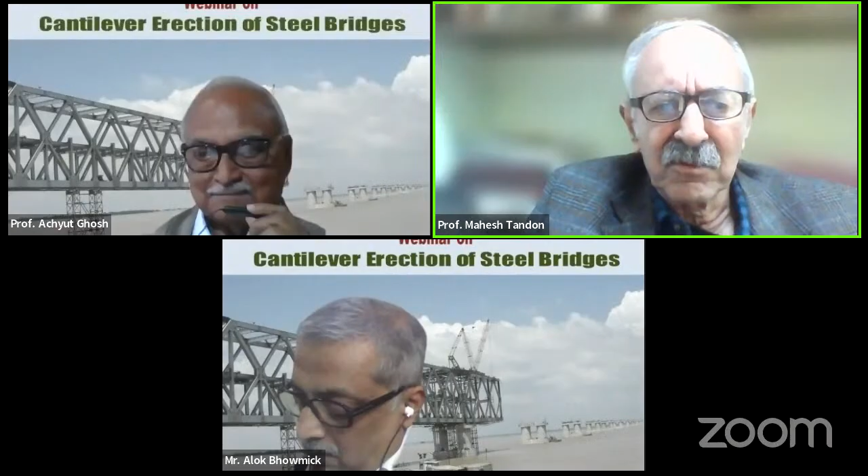So we have all seen and heard, and we know about cantilever construction of concrete bridges, but not many people know about the same technology or similar technology being used for steel bridges. So that is the subject of presentation of Professor Achyut Ghosh today. May I request with these few words Professor Ghosh to take over and give us an idea of the cantilever construction of steel bridges.

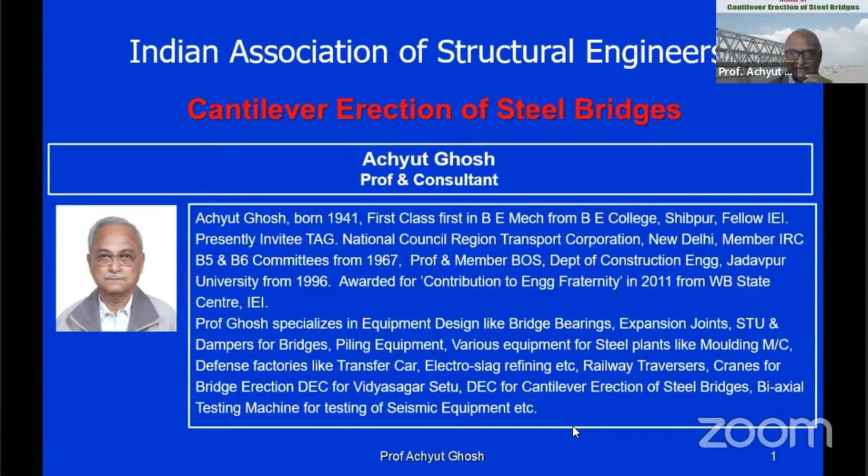So I'll share my screen. Okay, how do I do it? Yes, share. Achyut is very competent in all these digital things, at the age of 81. The way you started, I thought you were digitally handicapped like me. But we learned a little 15 minutes before - they taught us how it has to be done. Okay, so this I'll put like this. How do I do it? Okay, that is fine, we go next.

As I said, this is our subject today. But to our friends in the engineering profession who do not use the technology of preferred numbers in their profession, I believe they are losing something.

So in the course of this cantilever erection steel bridges scheme, if I start talking preferred numbers like a professional talk, I think people will fly away, they will be afraid. So in between this cantilever erection scheme, I'll introduce the subject of preferred numbers - how do I select the length of the jib, how do I select the length of the mast, and various other things. How does an engineer select the dimension of a room? How does an engineer select the span of a bridge? All this will come into our discussion.

I have a habit of a roof garden in my house in Salt Lake, Calcutta. So whatever you are seeing - various vegetable items interspersed inside the slides - they are produce of my roof garden. I'll now show a few bridges which have been erected by the method of cantilever construction.

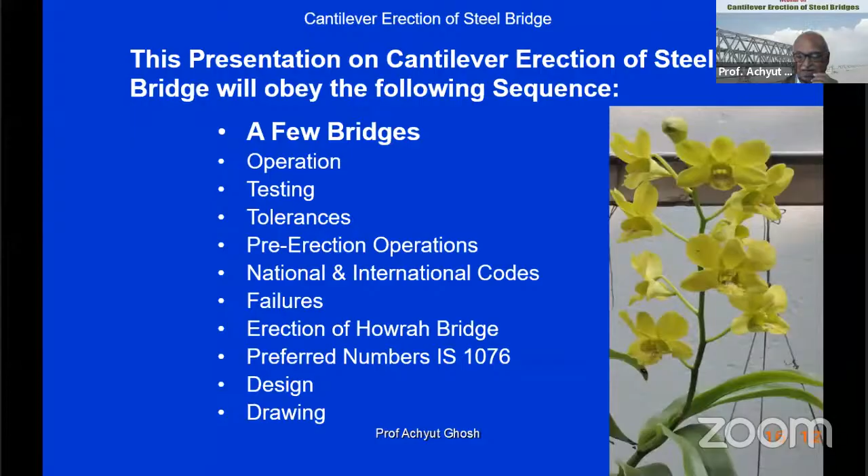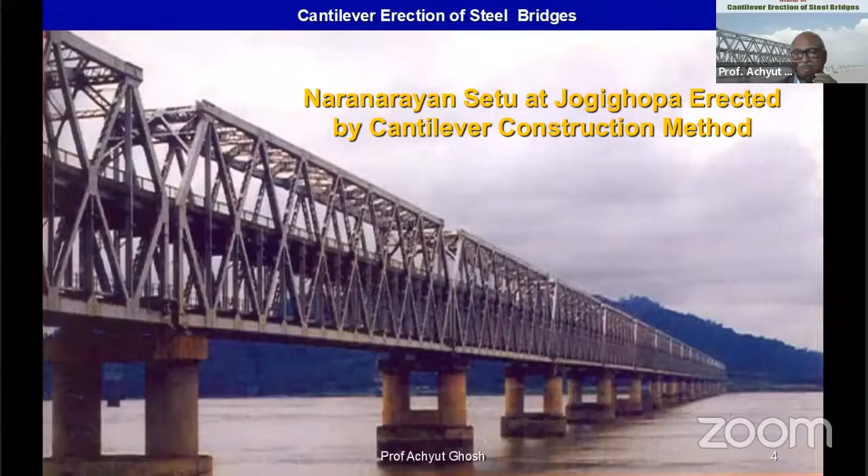This is a 5-kilometer long bridge, Naranarayan Setu at Jogighopa, erected by the cantilever construction method. This is something beautiful, and it's 5 kilometers long. I used to visit there periodically, maybe once in 2 or 3 months. This was constructed by Jessop's and BBJ, and fabrications were done at Jessop's, Burn, Braithwaite, etc.

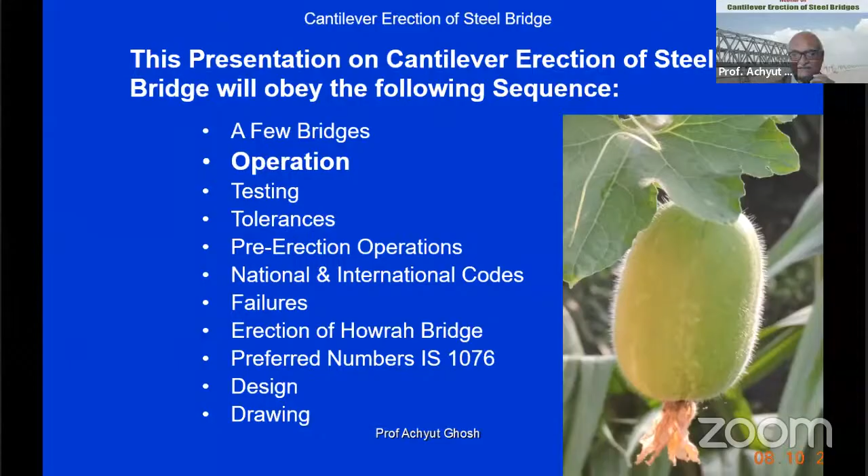Next, operations will come - how the cantilever construction erection system operates. The beauty of this scheme is you erect only one span at a time. There may be 28 spans, maybe 25 spans for 5 kilometers or 3 kilometers, maybe 120 meter span, 103 meter span, double broad gauge, single broad gauge, whatever the combination, with a roadway on top. You erect this first span only, which is called the anchor span. This anchor span will progressively give way to the next, which will be an anchor span when this is erecting a cantilever span.

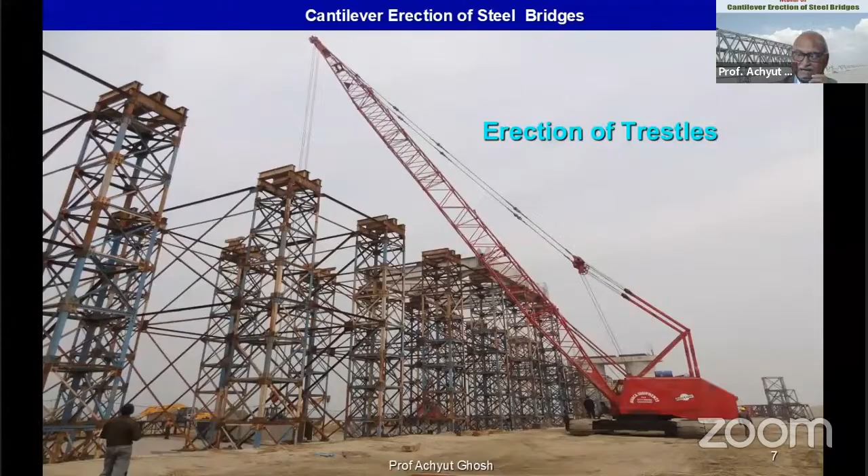This is the erection of the trestle, done by a crane. Erection of the anchor span is going on over the trestles - the first span. The anchor span is almost complete. This is all on trestles, mostly on the shore area, so you get dry land and you can use your lorry on this roadway.

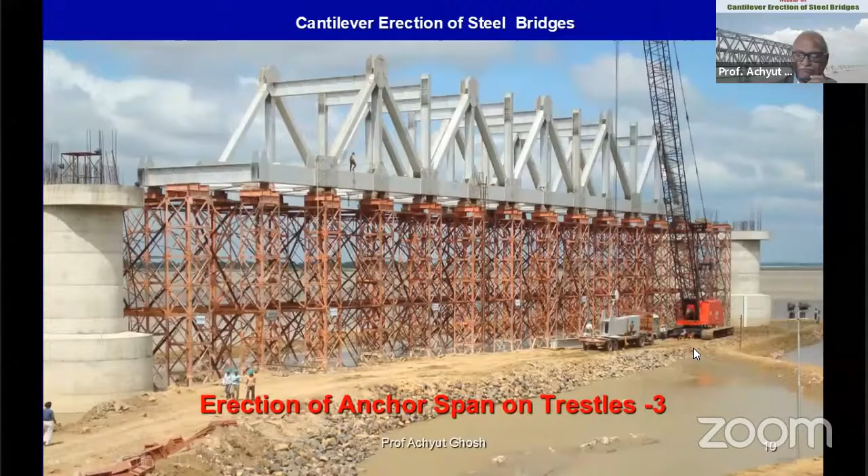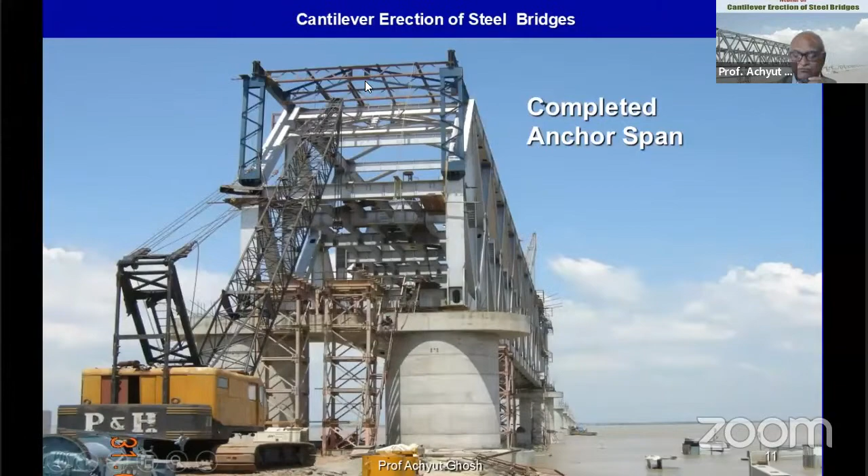You will see this in the Naranarayan Setu over the river Brahmaputra in Assam at Jogighopa. This is the anchor span being created on the trestles, as you saw earlier.

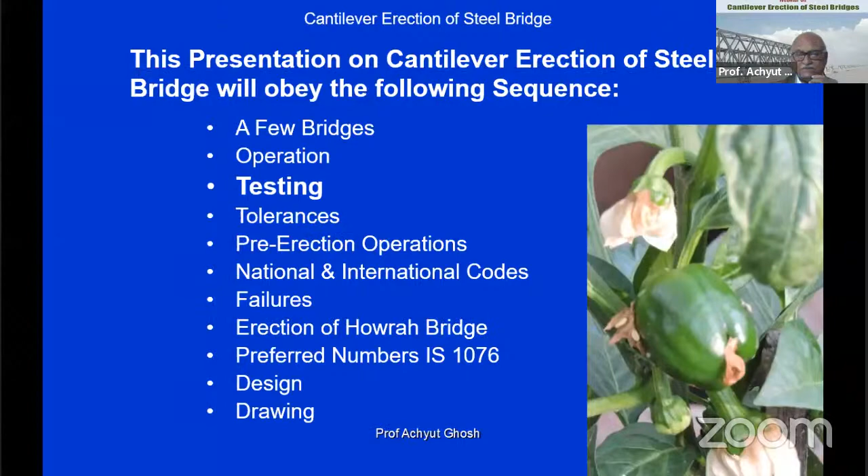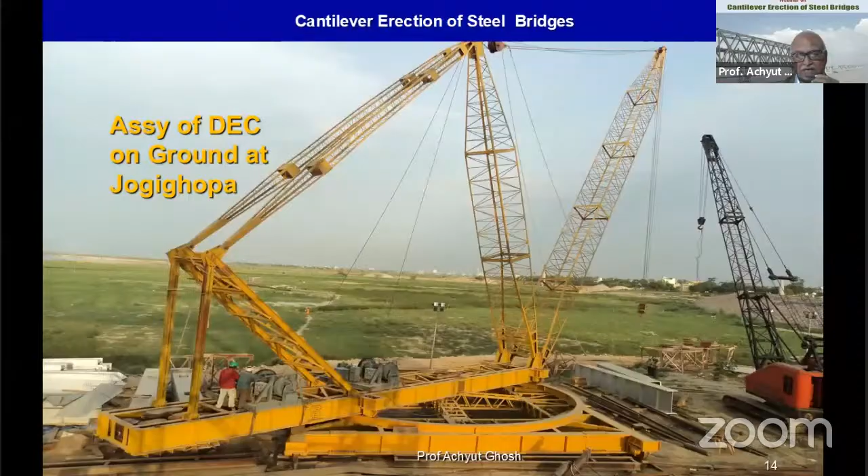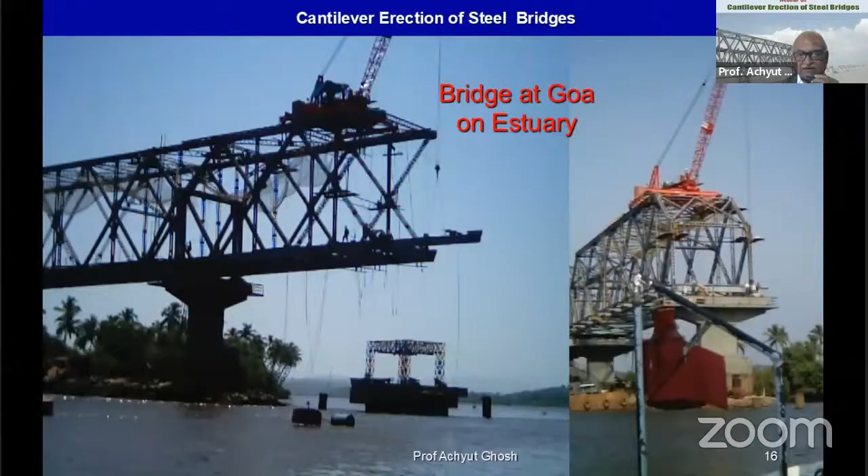These are erections of various spans in Goa, in an estuary. This was done by Trafalgar House. Again, we tested this thing on the ground. It was rough painted, but finally when it is used, it is painted properly. This is the erection scheme, the erection position.

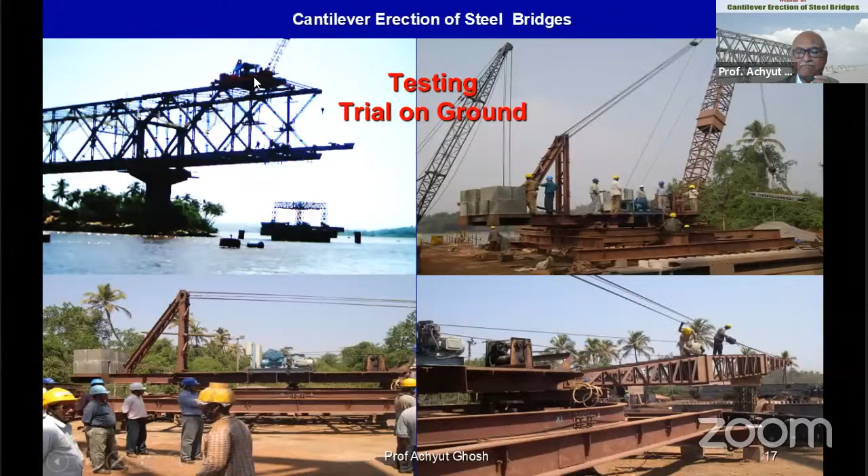Though we have tested on the ground, on the anchor span, which is a smaller approach span, we again test it. Testing cannot be avoided. You will be testing, depending on the lives of the people working.

Now we are talking about tolerances. Anything in engineering you do - mechanical, civil, electrical, metallurgy - there has to be tolerances, and the tolerances have to be specified.

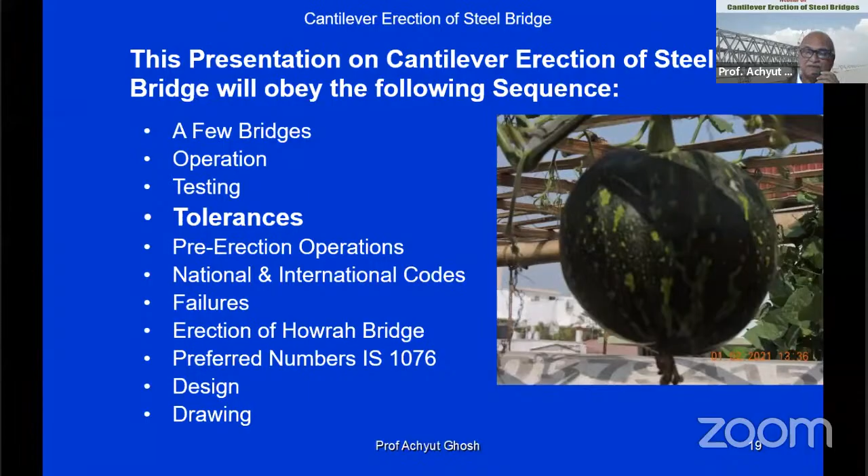Coming back to tolerances - you can go on increasing them, but please try to know who is the manufacturer, who is the constructor, what is the competence of that construction company, and fix your tolerance on the drawing to fit the contractor or manufacturer.

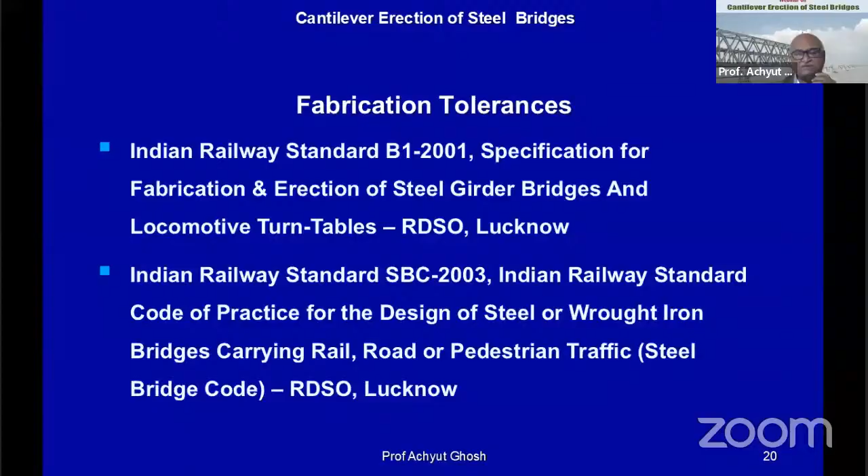For fabrication tolerances, we use the Indian Railway Standard B1 specification for fabrication and erection of steel girder bridges, and the Indian Railways SBC 2003 Steel Bridge Code - the Indian Railway Standard Code of Practice for Design of Steel and Wrought Iron Bridges carrying rail, road or pedestrian traffic. For railway bridges, these codes have been adapted from the IS codes, but with specified grades. There are 4-5 grades in IS, with 3 grades specific, and they have specified which grade to choose.

Now, pre-erection operations - what is to be done before starting erection. Let me introduce this: this is the hoisting rope, a single rope.

The purchase number of falls has been created here. This is called the bottom block, which carries the load. When using a crane, consider that the weight of the bottom block, the wire ropes, and any tackle at the tip of the bottom block will all be added to the weight of the material. If the crane capacity is 16 ton, and the material is 12 ton, with appurtenances at 1 ton, bottom block at 500 kg, and wire ropes at 200 kg, all this adds to the carrying capacity required of the crane. So you select your crane accordingly.

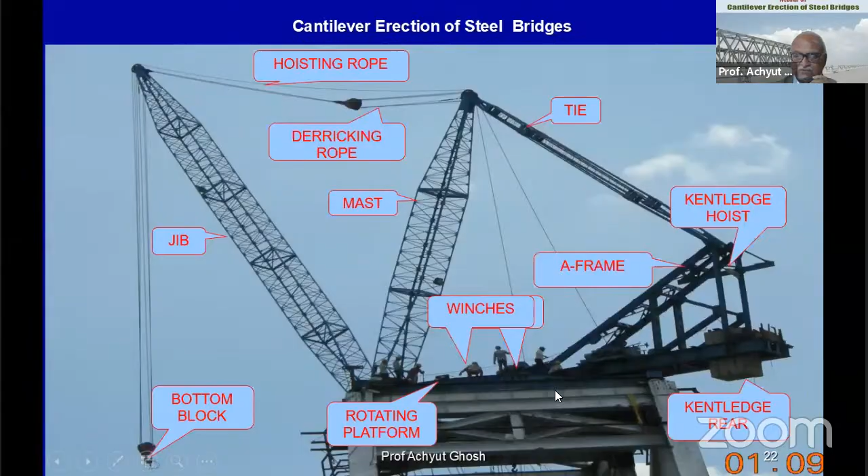This is the derricking rope, with falls created here, and these are thicker wire ropes holding the jib tip. This is the mast, this is the tie, and this is the A-frame. Then we have the kentledge rear - somewhere there is a central kentledge - and this is the rotating platform. This is the carriage, the undercarriage.

Erection sequences. You can erect normally this crane, derrick erection crane, DEC. It may weigh anything between 30 ton to 110 ton. So you cannot erect a 110 ton on the ground and take the whole thing through. The cost of the crane will be too high.

So what we do, we raise the elements. We do once trial erection on the ground, and then this undercarriage, central pin, rotating platform, kentledge, mast and tie, winches, jib, kentledge rear, all this we lift by the crane. The crane may be a 12.5 ton crane with the required lift so that it can reach the top of the bridge, and it has the requisite throw.

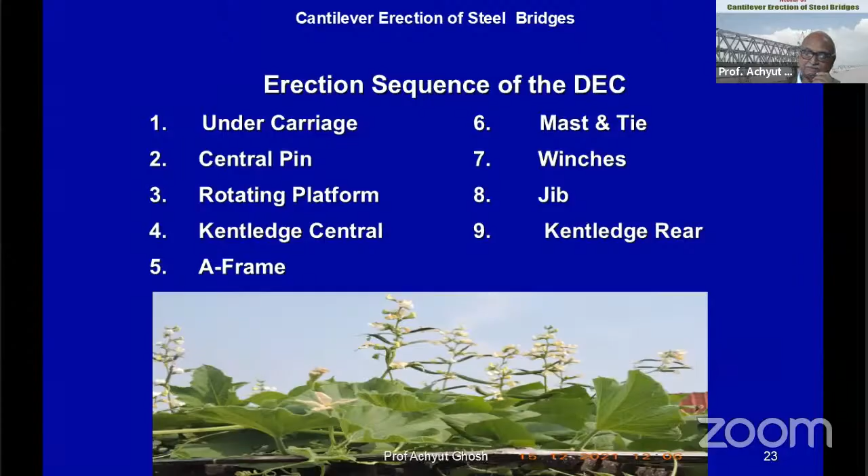So your splicing of the equipment for this crane has to satisfy the requirement of the crane, or otherwise one has to ask the contractor that, look, my minimum weight of the undercarriage is about 33 ton. So your crane must be of suitable reach and required capacity at that reach. The crane from the ground will erect the machine here. So this is the lift. And of course, the weights are given in the drawing, weight of each individual element. You have to do that.

So pre-erection operations: deflection of the erected span, which I will discuss gradually, effect of anchor span, buffer link, temporary bearings. This I will discuss, and these are the related items: jacks, kentledge, traversing arrangement, additional bracket, pin pushing and extracting appurtenance. This I'll discuss.

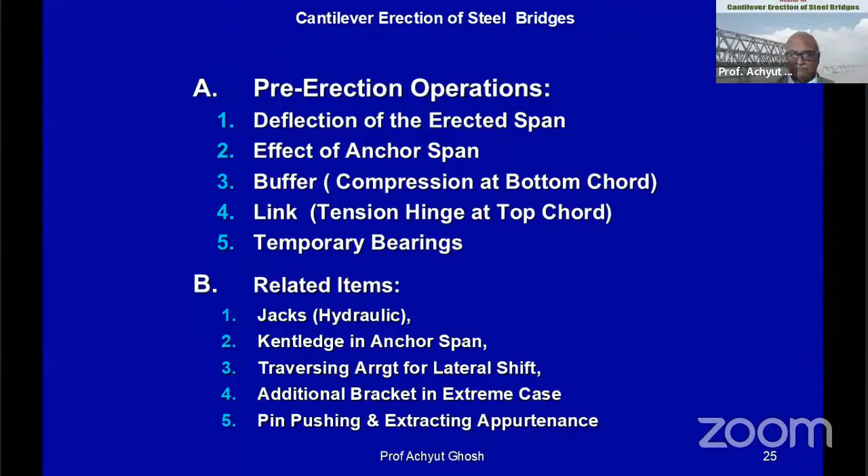So one thing I like to clarify, this erection crane has got very good stability in the forward direction. Again, not bad for the backward direction, but for the lateral direction beyond 30 degrees, its stability is not so good. So that is to be taken into account during planning, material transfer, etc.

So here there will be limiting indicators. Then I'll show you anemometers, accidents, competent supervisors. Accidents do happen. In my country, the printing report of accident or writing article of accident is not a done thing, but it is a great loss to the engineering fraternity.

These are anemometers. No operation should be done beyond the service wind. When the speed of wind goes up beyond the service, which in my country is about 20 meters per second, these anemometers can be put over the office. It can be handheld. This is handheld, etc. But in a site where crane equipment is being used, this anemometer is absolutely necessary.

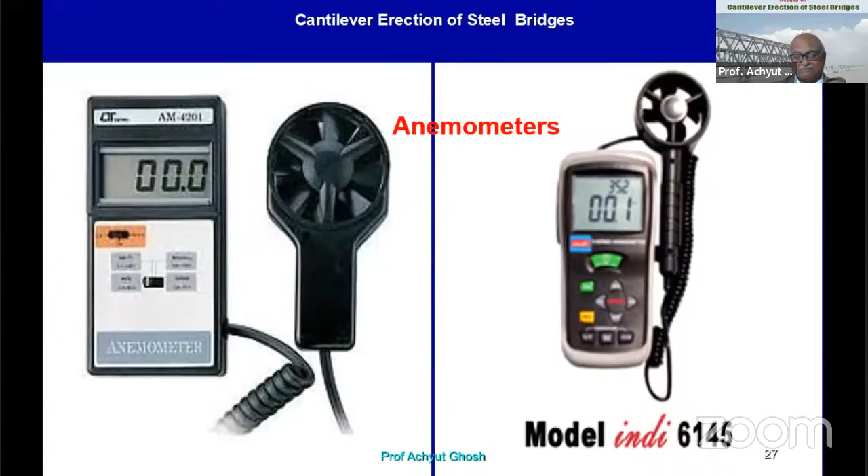Let us see. This is the anchor span. This is the erection span. The erection span cannot stay as is without the connection. But considering that there is no connectivity, this anchor span will behave like this, and the erection span will behave like this. And these are the bearings.

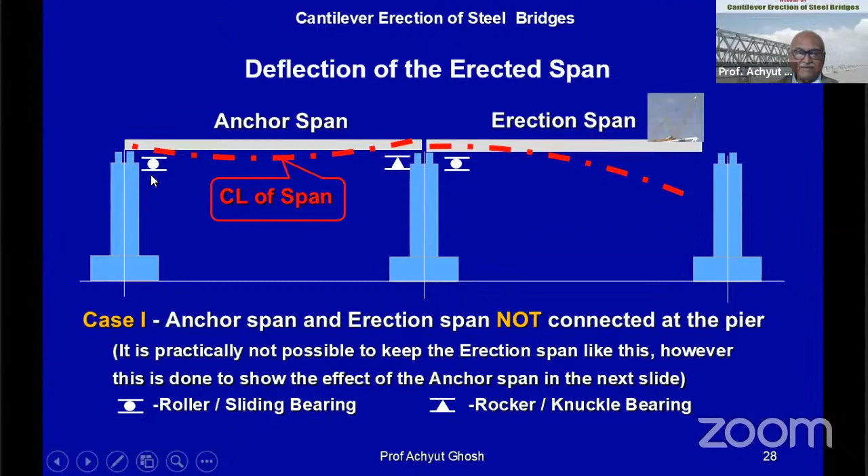But since they are connected, without which the erection is not possible, the revised deflection will be along this line. For a 120 meter span, this deflection, when it is approaching the next pier, may be 1.5 meter, 1.6 meter. So that correction is made in the link, which we'll discuss.

So this is the link. These are the pins, 6 sets of pins. These pins are 250 diameter, weighing about 500 kg to 700 kg. So we need special items to pull it. But it cannot be pulled when this is in the cantilever position. It must get a support on the next span, then it is jacked up, and then the pins are removed.

This is not a part of the bridge, so this is used in the forward section. As I said, when you are doing the compression, there'll be a compression here, tension here. So this is the tension link, and this is the compression bearing block. It's a buffer block, it's called buffer block. I'll show you the drawing of this buffer block.

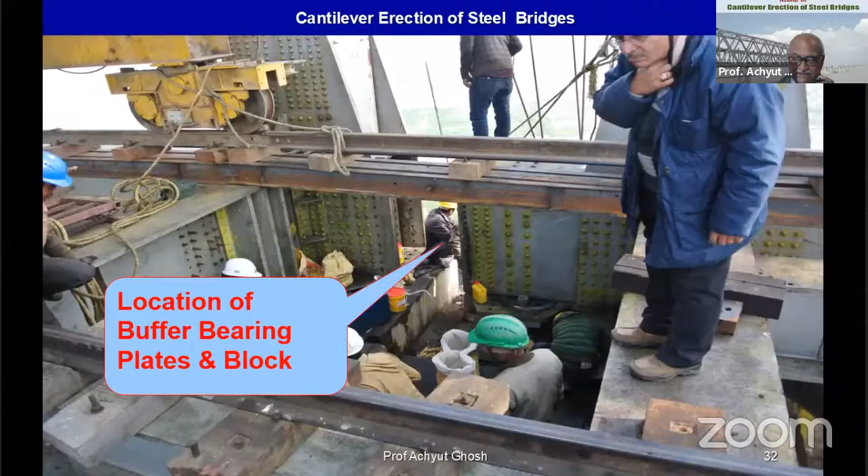This is the location where the buffer block will come. This is one span, this is the next span. And my friend Gonsalves is there. So this is the buffer block. It's a little bit carved on this side, little bit carved on this side, and a 500 to 1 ton steel block, quite thick. The gap between the two spans is quite thick, so it is 250 millimeter thick and all that. So the drawing is there.

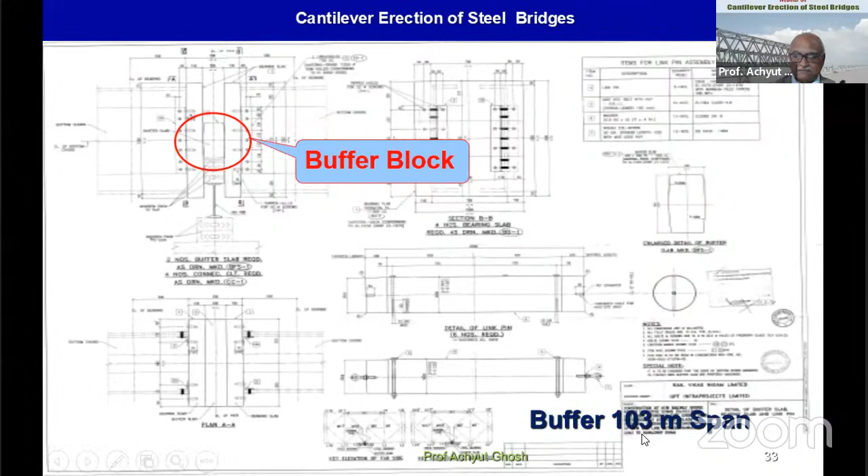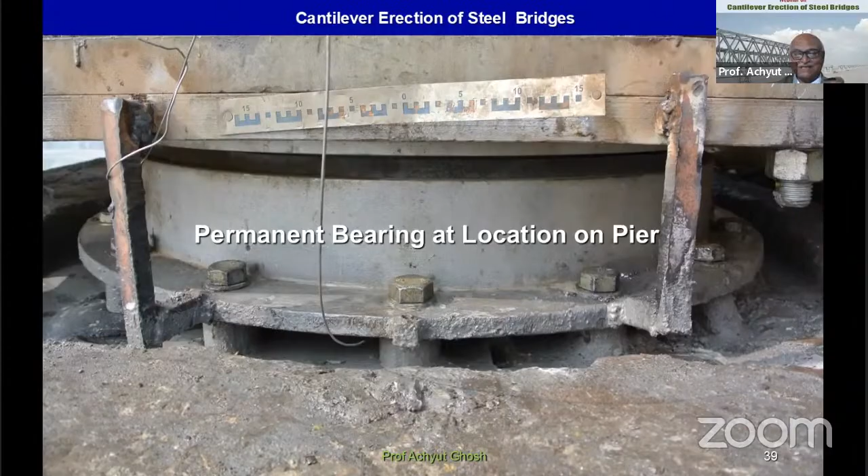Now, we have got temporary bearings and permanent bearings. Railway does not permit the whole erection to take place on the permanent bearings. You have to use the temporary bearings, and then after the erection is complete, one has to replace the temporary bearings by jacking up the span and use the permanent bearings. My theoretical friends who do not visit sites may be aghast looking at the condition of the bearing, what it looks like. But at site, things happen.

Now, as I said, related items: jack, lifting at both ends, kentledge in the anchor span. I'll show you the traversing arrangement for the lateral shift, additional for extreme cases, pin pushing and extracting appurtenances. Now, what happens is there are longitudinal lines and there may be a lateral shift at the tip of the erected span, so we have to correct it.

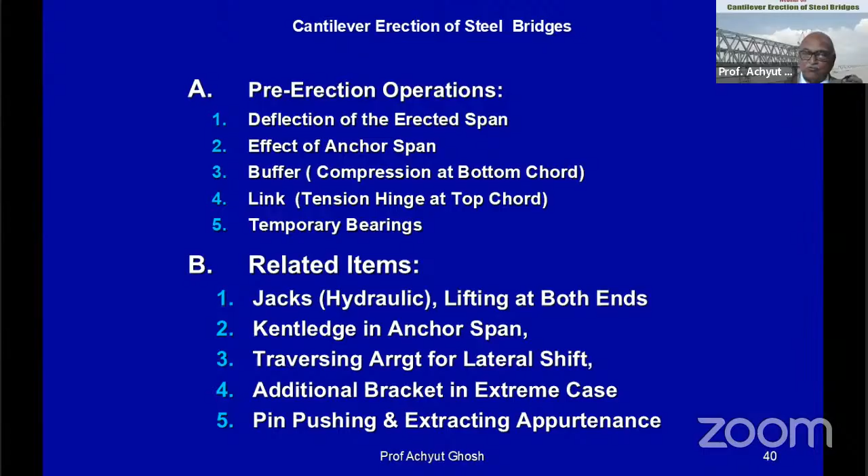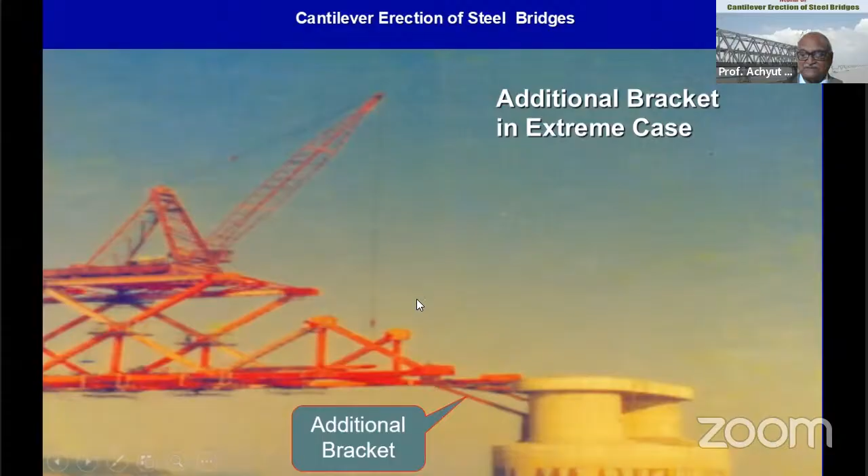Sometimes the cantilever span may fall below the level, so you have to create a bracket to put the jack to lift it. These are the lifting and traversing jacks. You lift it, then traverse it laterally to align along the long axis of the bridge.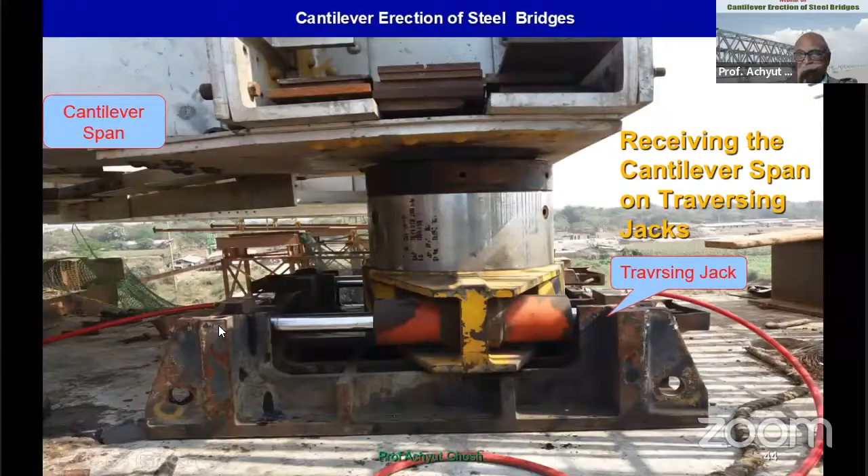The material has to be transported. It is really a dangerous thing to transport over the bridge, so we do the transportation on special trolleys. As you go on increasing the bridge to the next span, you have to go on erecting a temporary track on the same trackway, but these rails will later be changed with new tracks.

In our country, this is human powered. People push it to take it from the end, or sometimes it is fed from the middle of the span by one more crane, with material coming on boats on the river. Or there can be a roadway built alongside the bridge and the material may come by lorry on the roadside.

Now, national and international codes. Though it is national and international codes, I have not given any international ones. There are ISO codes, but in my country or anywhere else, there is no such code for the deck erection crane. There are codes 807 and 3177, which are for design, structural and testing for cranes, and 3177 is the mechanical part of the cranes.

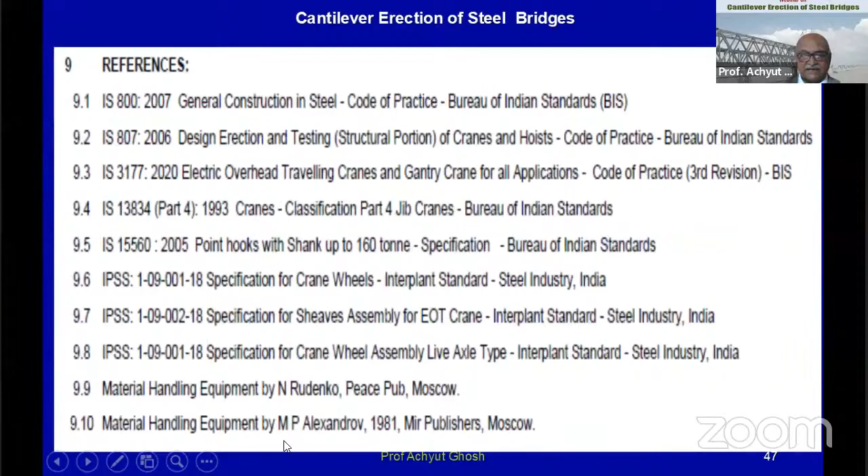I have also used two more books: Material Handling Equipment by Rudenko, a Russian publication, and Material Handling Equipment by Alexandrov, also a Russian publication.

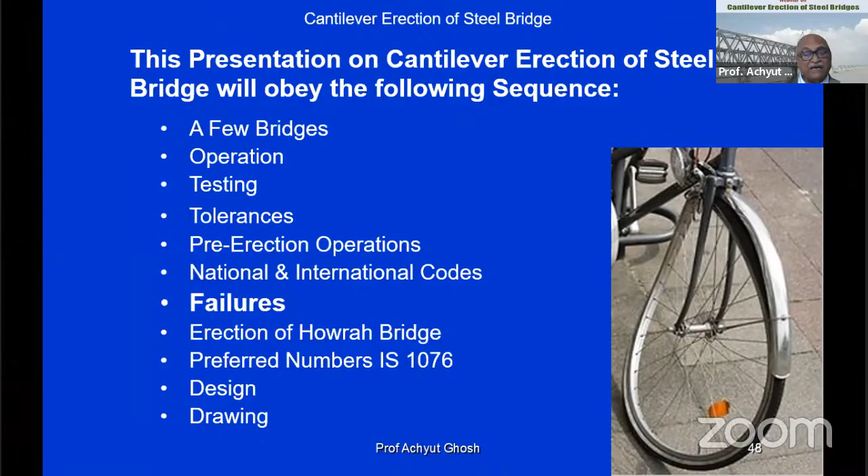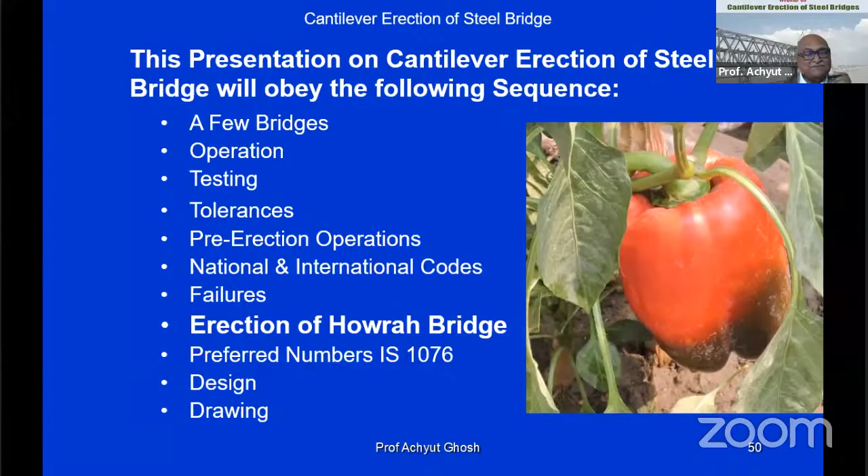Now, why is the erection of Howrah Bridge coming up? A similar type of crane was used for the erection of Howrah Bridge, and that crane weighs 622 tons.

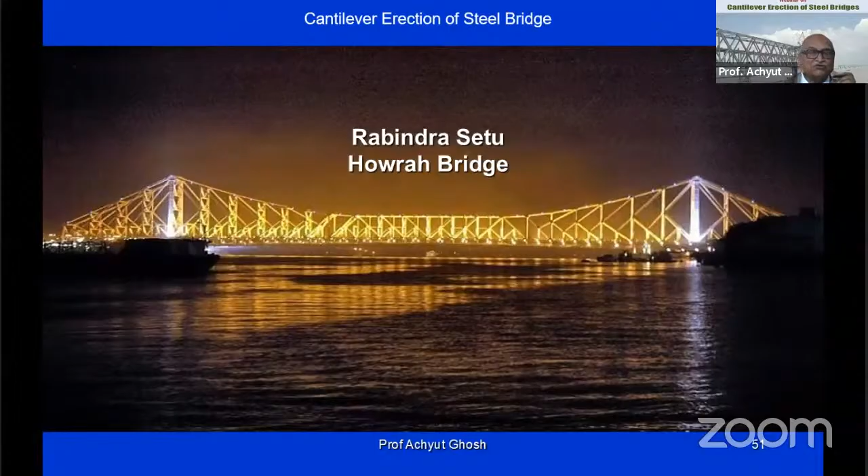How the cranes were erected, where they were assembled and all that, we cannot go deep into it. I've got only 2 slides. These are called creeper cranes, one on each side, tied together, with the whole appurtenance including their leveling system. As the slope changes, this leveling system changes. All this taken together is 622 tons.

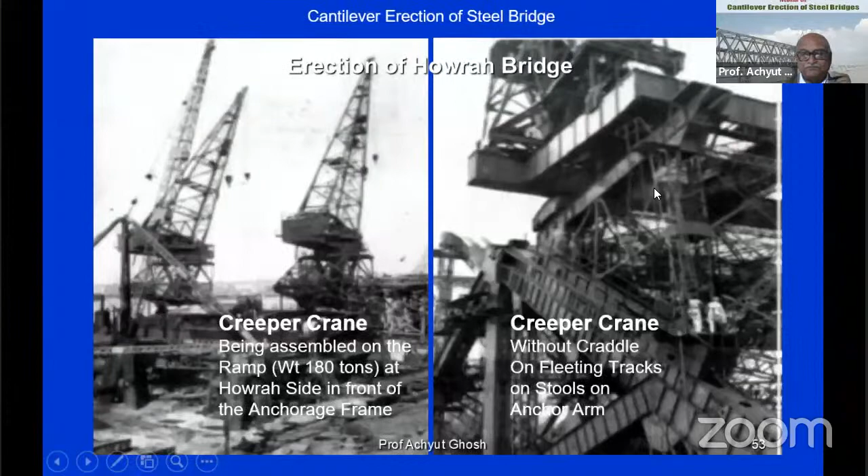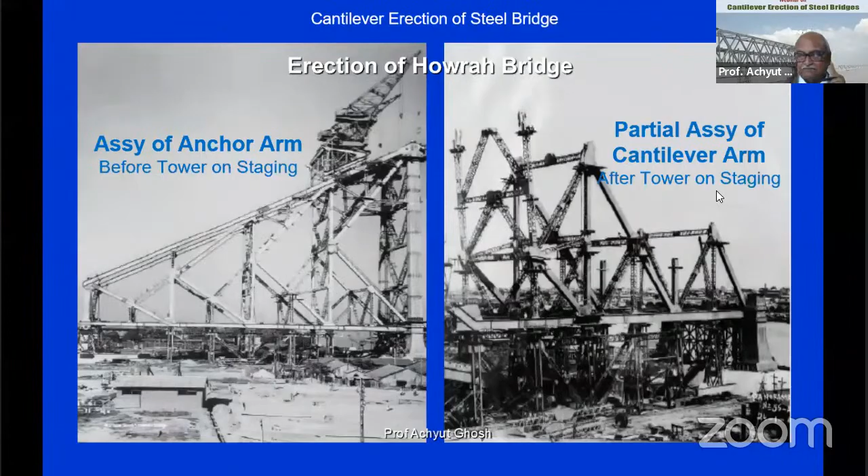This is on the anchor span being erected. This is on the cantilever span. This will be erected, done from the ground and rest. At the end of the anchor span is the creeper crane, as they call it, and then another creeper crane, and the end of the creeper crane is used to erect the towers.

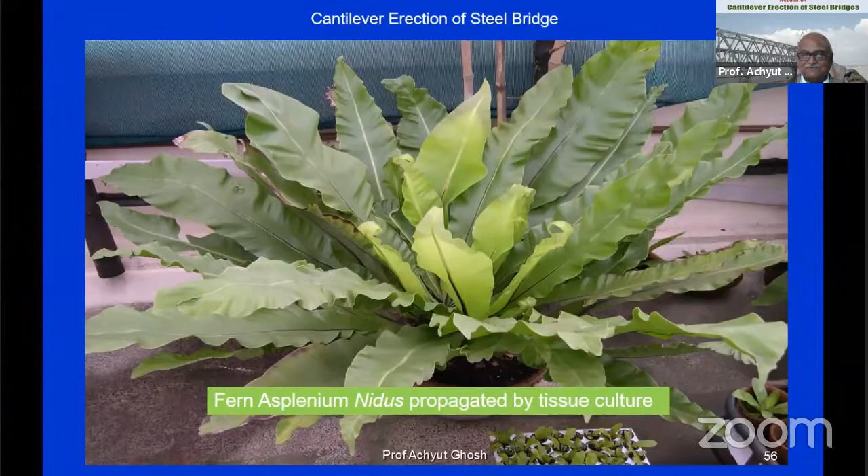As I said at the beginning of the lecture, I'll be discussing preferred numbers surreptitiously in the form of the cantilever erection of steel bridges. Had I called it a lecture on preferred numbers, there would hardly be 100 participants, but I believe now the number is much more. Anyway, as I said, anyone in our engineering fraternity who is not using preferred numbers in his day-to-day work is not doing justice to the profession. Sir, let us see.

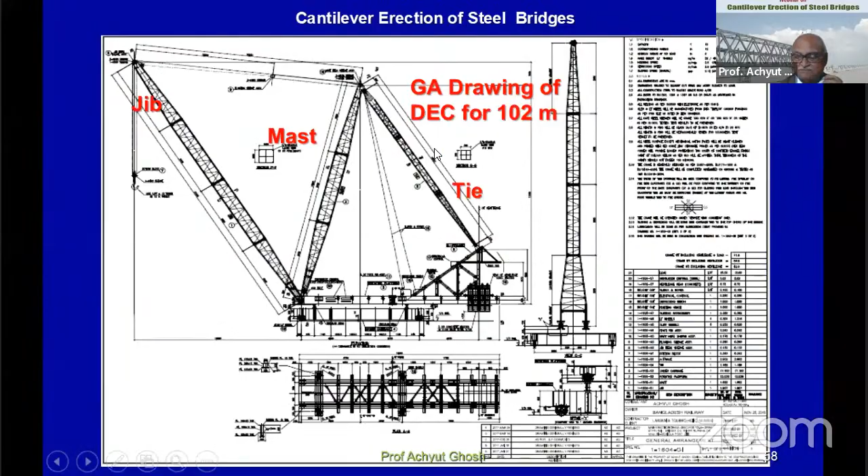These elements are common. You make a jig in the factory to manufacture this so that they match each other, so they have to be common. This profile is common to this also, so we settle the length of the splice from the concept of preferred numbers. The width, the jib length, and the angle size have relations. For certain jib lengths, this may be 1 meter; for certain jib lengths, this may be 900; for certain jib lengths, this may be 800, etc.

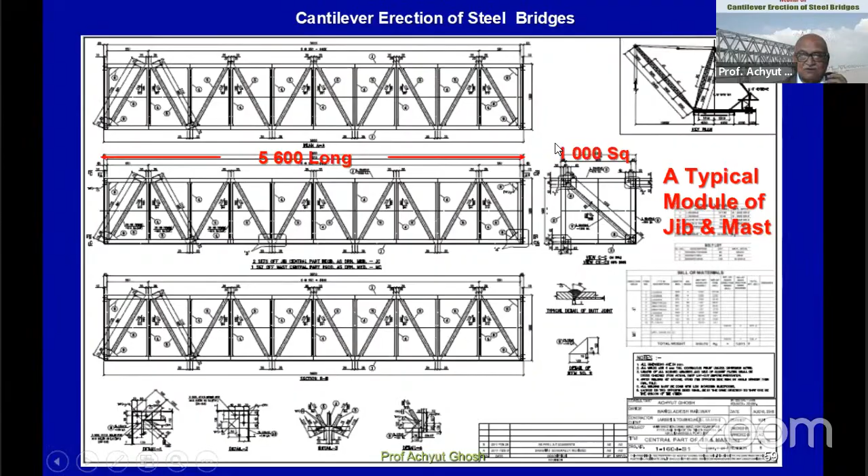So how do you get this, 5600, 1000, or let's call it 1 and 5.6? I get it from the preferred number series of R20. This is 1, this is 5.6, and these are 20 steps. Why R20? Because these are 20 steps. It could be R5, R10, R20, or R40. Once you go through IS 1076 part 1, part 2, part 3, or ISO 3, you see ISO considered this so important that at the very beginning of their series, at ISO 3, it is preferred numbers. So there are 3 parts: ISO 3, ISO 17, ISO 497, all published in 1973.

Our IS 1076 part 1, part 2, part 3 was published in 1985. We just copied it, we didn't make any change, we just copied it and said it is taken from the corresponding ISO. I'll come to the beauty of it. So you have seen the R20 series. The next one is the R5 series, this is R prime 5, this is R5. What is the beauty of it? Say you want to produce a product, let's say electric motors, from 1 to 10 kilowatt. If you say 1, 2, 3, 4, 5, 6, 7, 8, 9, 10, you can make an inventory of 10 items.

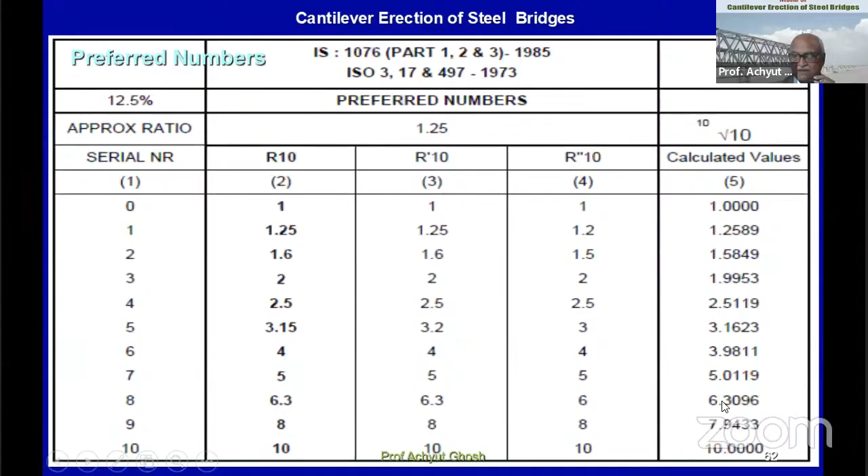So we call it R10. We use R prime 10, R10, R double prime 10. There are certain sacrifices, but these are the actual 10th root of 10. This is R20. This series is extremely favorite to me.

In all my designs, I have never deviated in selecting the length of any element, the dimension of an element, the hole size, from this series. It can be multiplied by 10, 100, any power of 10, and also by 10 to the power minus 1, minus 2, minus 3, ad infinitum. This goes on giving you a series which is very compatible when things fit each other.

When you fit, what is the size of your room in a building? We select from preferred numbers. What will be the size of a span? We select from preferred numbers. You see, in Delhi, so many flyovers were made during the 1982 Asian Games.

I know Mr. Sitla Saran, he is dead now, a great engineer, my regards. Mr. Sitla Saran decided we will make one single span and then add on other spans. But that single span was from preferred numbers.

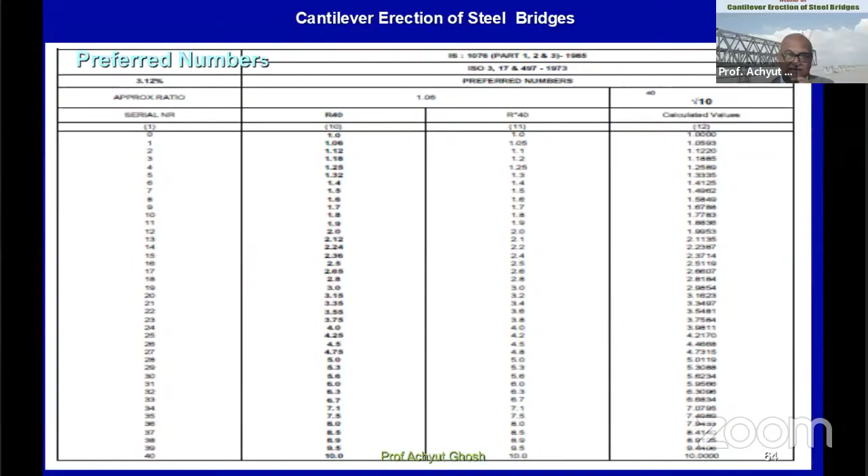Now we have got R40. These are the R40th root of 10. They are the limit end, the 40th root of 10. I have not heard of an 80th root of 10. And these are the series R40, R prime 40.

I don't use this very often. I use R prime 20 very often. Sometimes R prime 20 more than R20. There is hardly one difference here: R prime 20, and the rest are all the same. And there is another difference here.

3.15, 3.2, 3.55, 3.6 - all these series you can multiply by 10, 100, and you see, if you make a product, your product size will be reduced, your inventory will be reduced, and your fitting technology will be much improved.

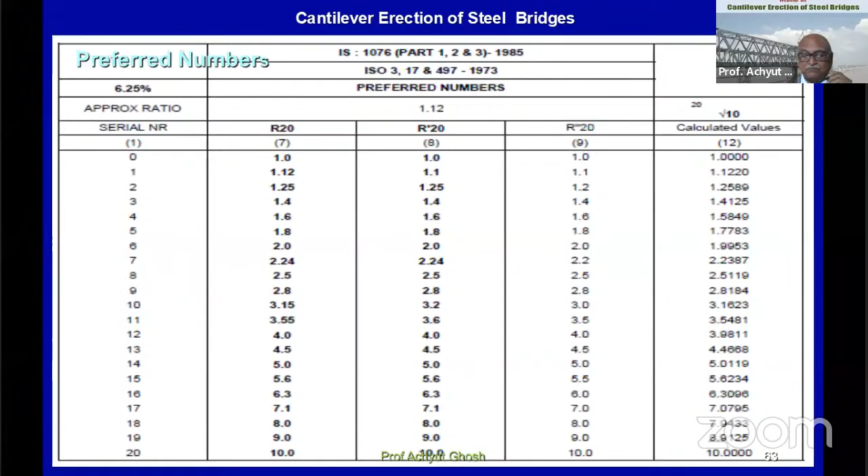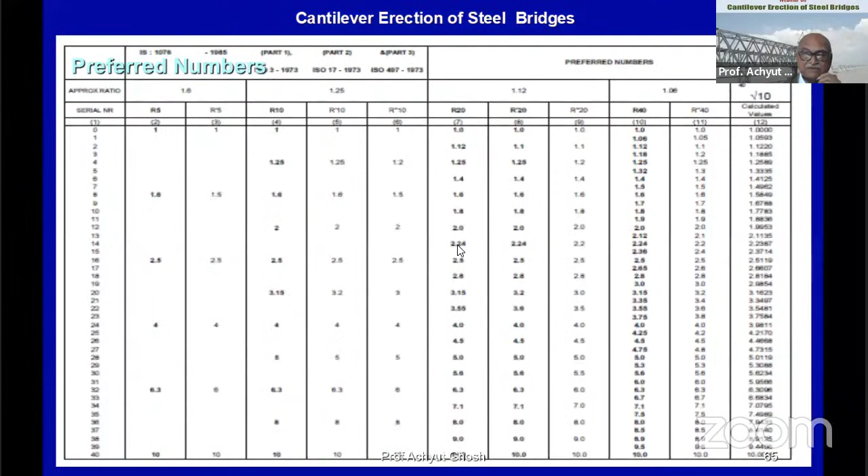This has preferred numbers, the whole series: R5, R10, R20, R40, and this is the root. This is taken from the code, just a dead copy, all the series. And this is Renard number, and this is our preferred number.

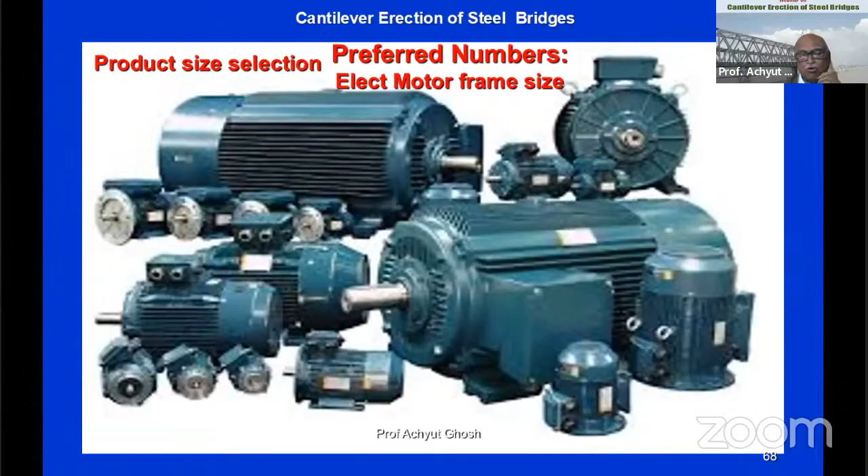Say you are preparing electric motors. All items all over the world follow preferred numbers. See the height of the center line of the shaft, the diameter of the shaft, so that anybody - you call it frame size - anybody can select any frame size for the kilowatt produced, but it matches all over the world. That is the beauty. Your fasteners, everything, your fastener threads, everything follows preferred numbers.

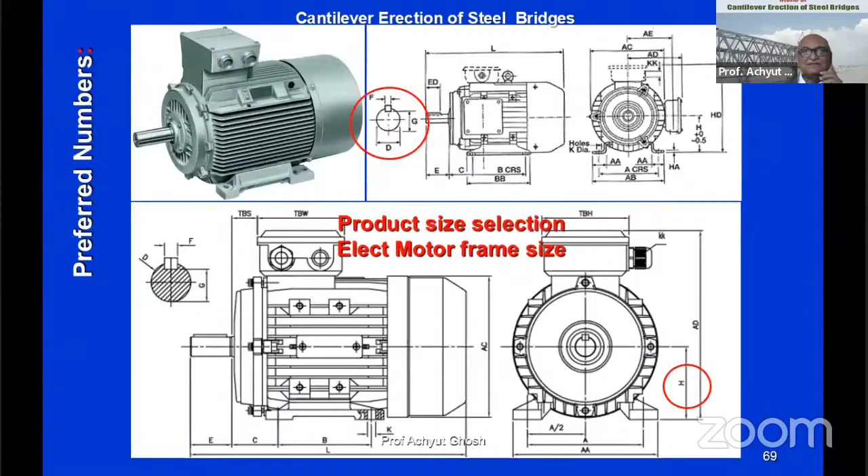Otherwise, the world will go mad for spares. You import one item from Europe, one bolt gets lost, you replace it with another bolt. Unless there are preferred numbers, it will be a whole lot of mess.

You see our steel production, the rods, the bright bars, the plate thicknesses. Plate thickness, I can tell from memory: 10, 12, 16, 20, 25, 28, 32, 36, 40, 45, 50, 56, 63, 71, 80, 90, 100, etc. So our steel plants, and if you look at our standards, IS 1076, you'll find all our structurals follow preferred numbers.

So I was thinking of asking you to stop recording, but it doesn't matter, forget it.

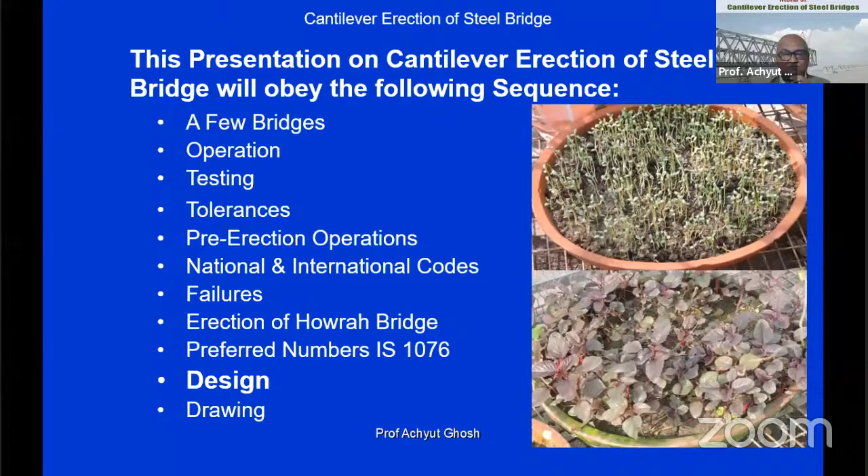So I'll show you now design and drawings. Now we are almost at the end of our time. I have got another 3-4 minutes. Some 10 minutes has been lost. I have got about 13 minutes. Okay, so this is the crane. How do you go about design?

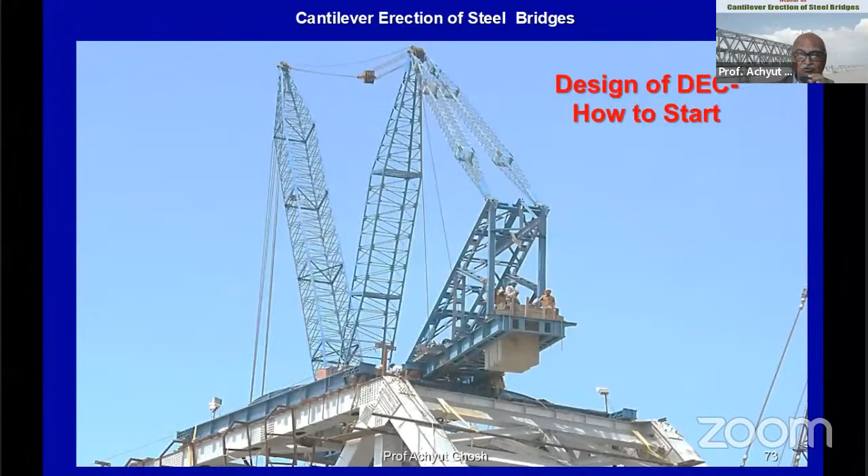First, you make a layout of the proposed bridge. What support is possible? And what will be your individual node size, the diagonals, the weight of the bottom chord, the weight of the top chord, and what will be the reach of the crane.

So you need the worst weight, the bottom chord, and the reach corresponding - or the worst reach - if it is standing here, this diagonal or this vertical, the worst reach and corresponding weight.

These two are necessary for designing the crane. And there is one philosophy in design of a crane: you fix up the member, top chord, bottom chord, and the diagonals for the crane weight that it carries, not for the self weight.

A railway is designed for a simply supported span. But here, when you are erecting cantilever span, that becomes a cantilever to the anchor span. So the whole role is reversed. In usage, the top chord is compression, the bottom chord is tension. During erection, the top chord is tension, the bottom chord is compression.

Now, before we do the erection design, we do the analysis. We do the analysis of the forces in this 11 or 13 sheets, I'll show you. We make a sketch, we do the analysis.

There are 5-6 conditions of stability and safety on the front: the highest span of highest reach with corresponding weight, the highest weight with corresponding reach, zero weight, minimum radius. In all these conditions, you see different colors, calculated under various load conditions. I do it for 5 times.

Then there'll be a mechanical design, there'll be a structural design. So we make the summary of forces for the structural design, which will be transferred to the structural sheet. And this is the summary of forces for the mechanical design, which will be transferred to the mechanical sheet.

Normally, I personally do not like total automation in our programs. This has been done in Excel, by me of course, but we have done it separately. This is design mechanical, this is design mechanical, then there'll be a design structural. So we take it, we don't continue.

We take it and put it in the mechanical sheet. This we take from the mechanical sheet, and this we take and put in the structural sheet. And then the structural progresses. I'll show you, as you see in the mechanical, this is design mechanical.

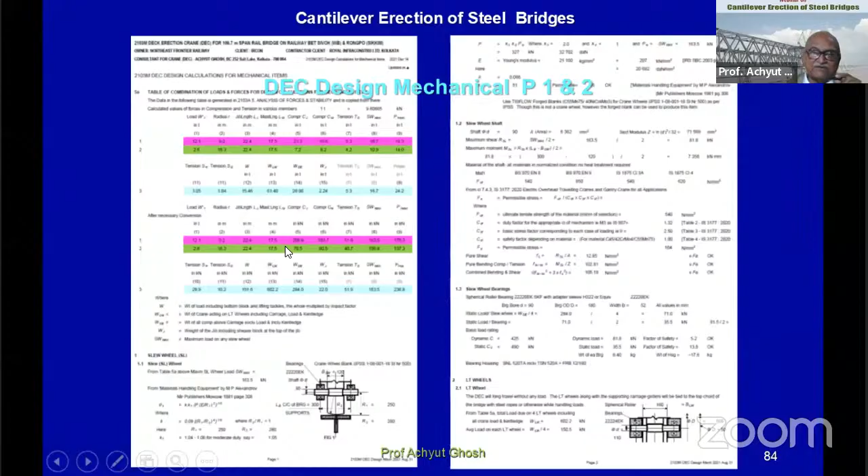These forces have been taken here. Now, sometimes in my country, the forces are given in tons. But our calculations for bearings and other things, presently we do in SI system, so this is done in Newtons. So we get the forces in tons and kilograms, then we transfer them into Newtons and then do the full design.

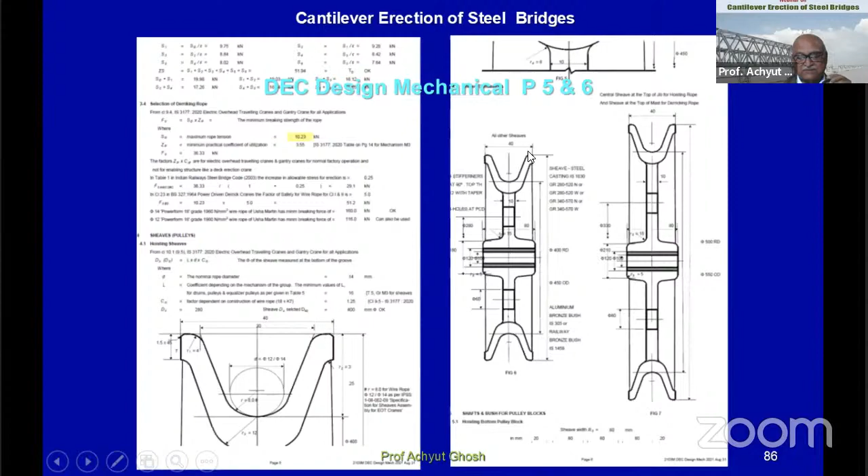The design of the lifting system, the design of the haulage system, the slewing, the derricking - this is derricking, these are the sheaves. As per IS, the sheave root diameters are all as per preferred numbers. So these are the various sheave combinations, various falls.

And this is the references used in the code. Now we are coming to design structure. Again, we manually transfer the forces here, we change it to SI, and then the design has been done for the jib.

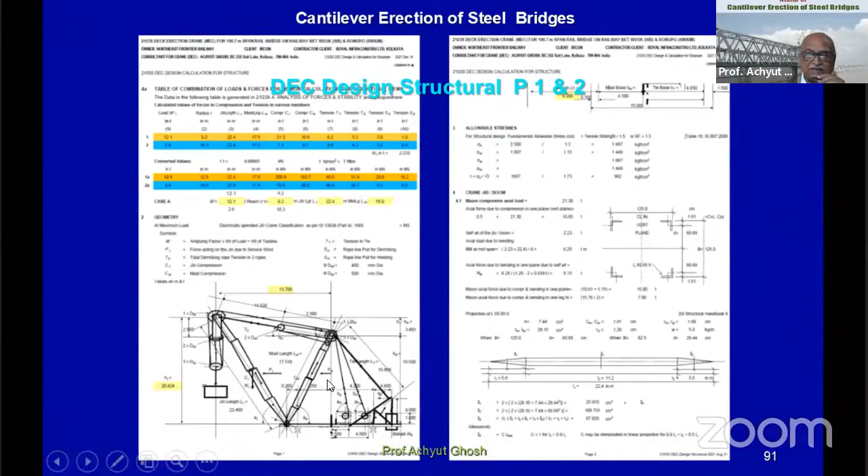There is a peculiar concept, or I'll say it's a lovely concept in our standards: it must fail globally, it must not fail locally. So the L by R of this must be lower than the L by R of the mast or the jib as a whole, so that it does not fail locally here - it fails globally.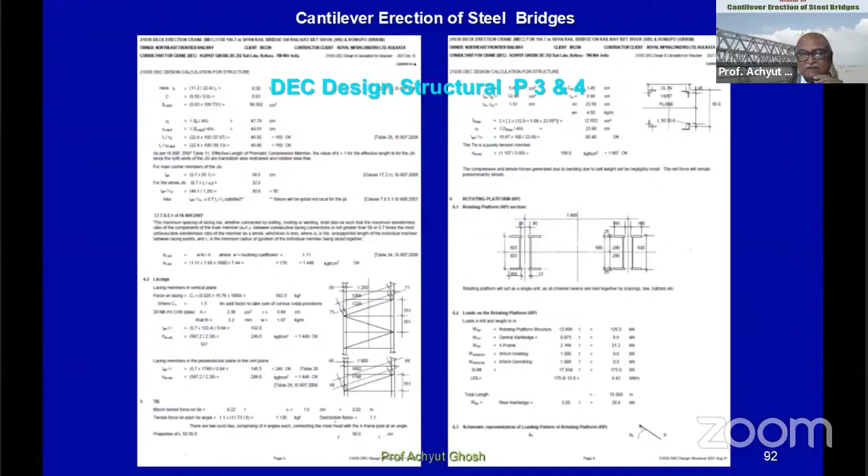Then there is a computer part. Computer part means, you see, the rotary platform is rather longish and it weighs 12 tons - it varies depending on the size of the crane. And then there is a kentledge here, kentledge here. So if this gets shaped like this, then your slewing function will be very much hampered.

So these forces we put into a computer, and we check the deflections at various points. There is a limitation of deflections given in Indian standards, and we go by it.

So these are the end results. Now we come to drawing.

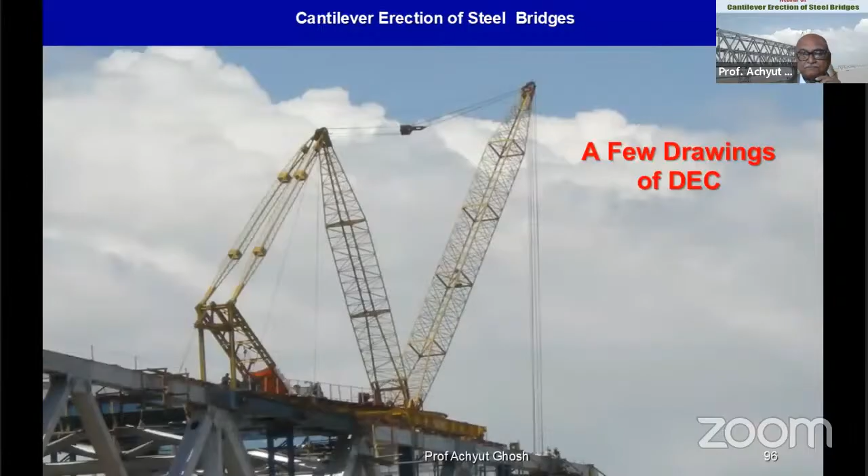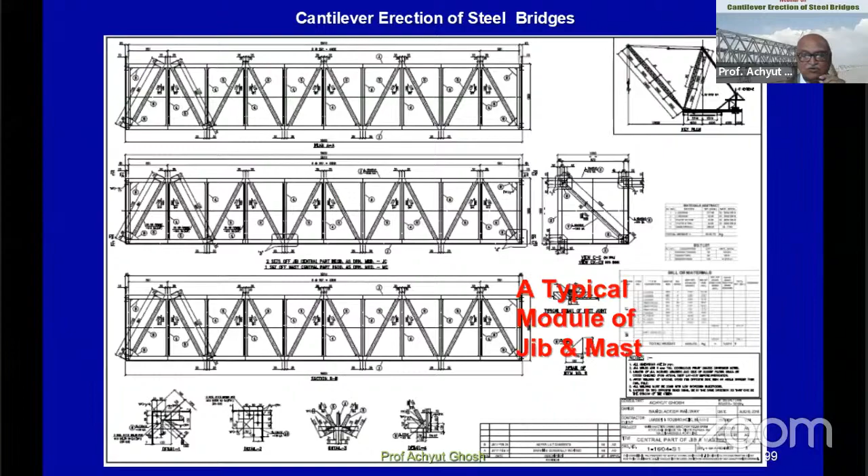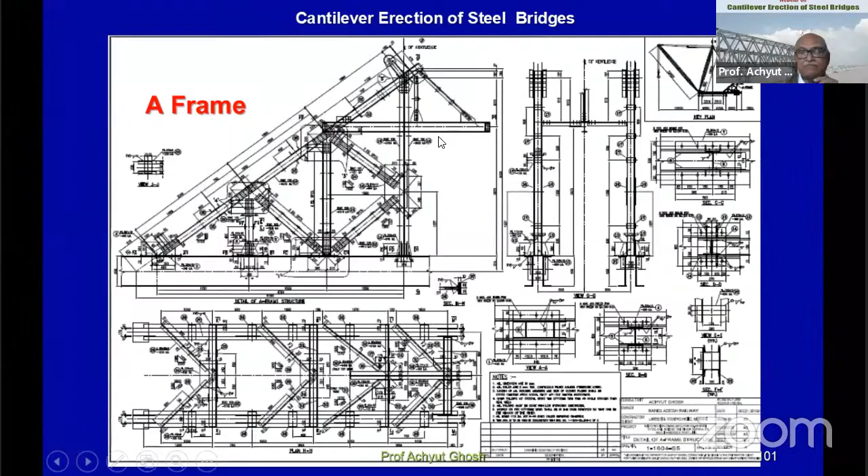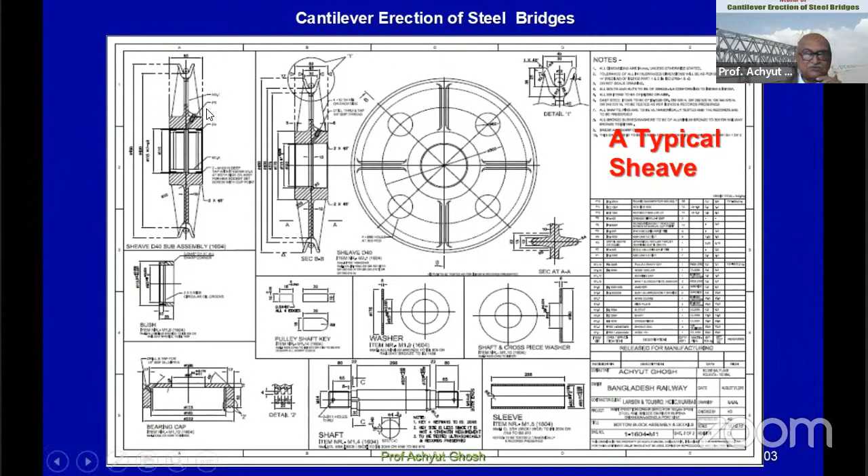Bottom block, a typical sheave. 2-3 sizes of sheaves are used in a crane.

Pivot pin, the central pin, which is against seismic forces. These are the slew wheels. Again, all these diameters and everything, they follow preferred numbers.

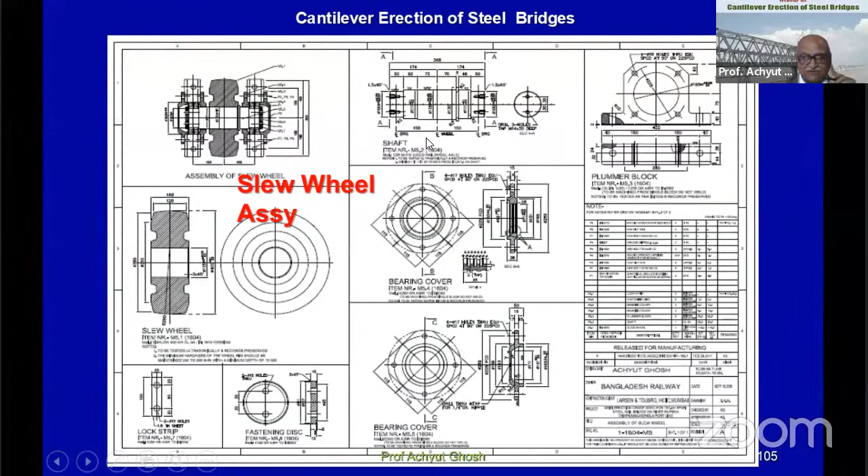And there is IS on it. I mean, there is no IS for slew wheels, but there is the IS for crane wheels, which everybody must follow. This is the LT wheel, long travel wheel.

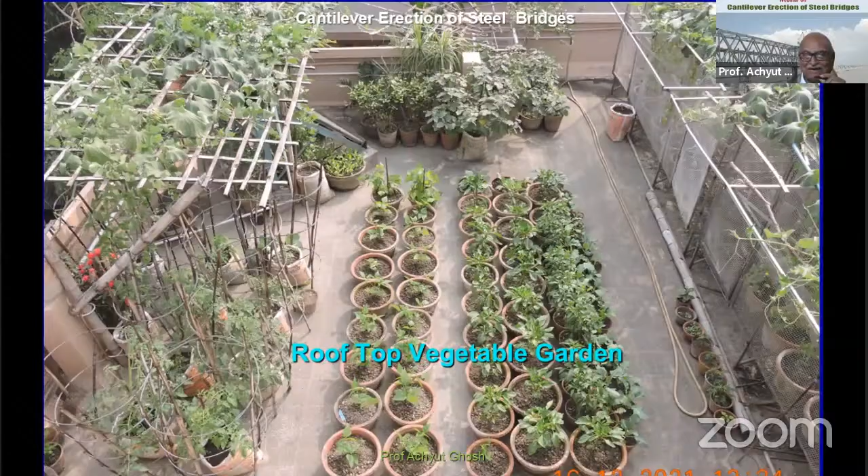I am at the end of my presentation, and this is my roof where I live, where from I am speaking at the moment. This is the roof of BC252, and we have got various vegetables.

It has been taken yesterday, this photograph. This is gourds, and these are tomatoes. These are French beans. This is your pepper, this is regular pepper, and this is bell pepper. And this is brinjal, and inside this there are various other items.

Whoever feels, I invite them. I am deeply involved in the horticultural society in this. We will die if we don't take care of our plants.

So, once you produce, say I produce 60% of my vegetable input on this small plot of land, and I distribute it to my friends, next door neighbors, etc. So I want to preach it that this amount of vegetable will not be transported. So that transport cost, that transport carbon dioxide is saved.

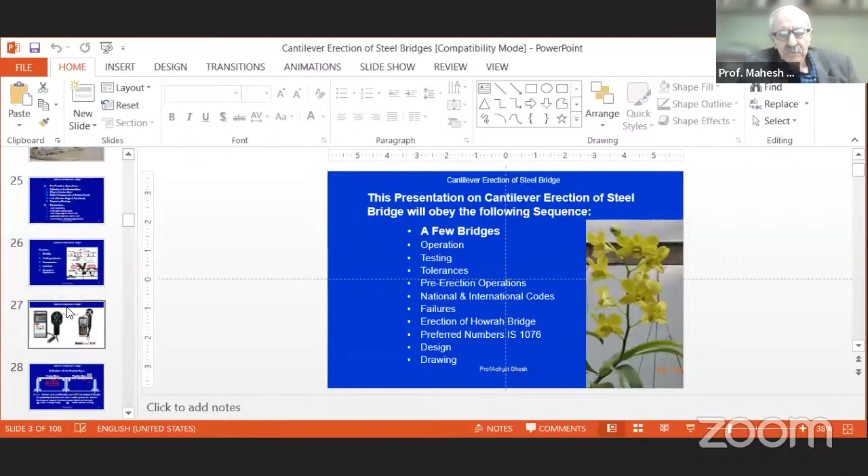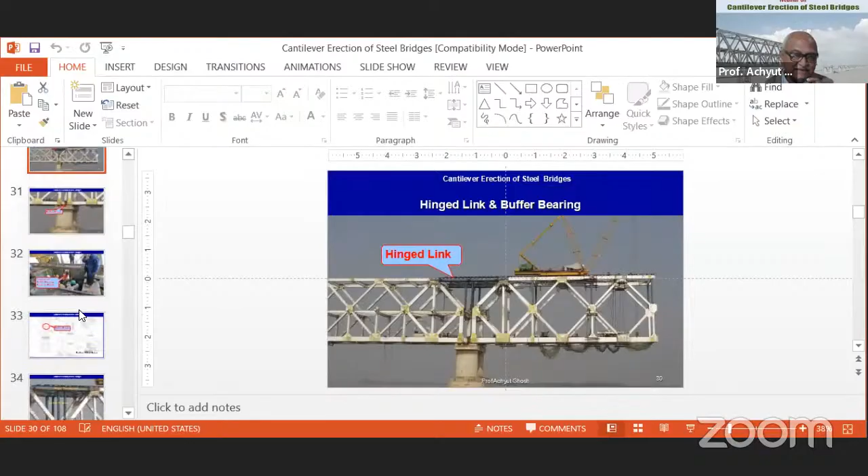Yeah, this one. This one. 30, yeah. You see, normally, just a second. Put it in presentation mode. Yeah, I mean after, okay. Okay, I'll do it.

You see, obviously, due to the cantilever action, this is going to droop down for a 120 meter span. It has been measured that it went down by 1.6 meters. So how do you permit it to?

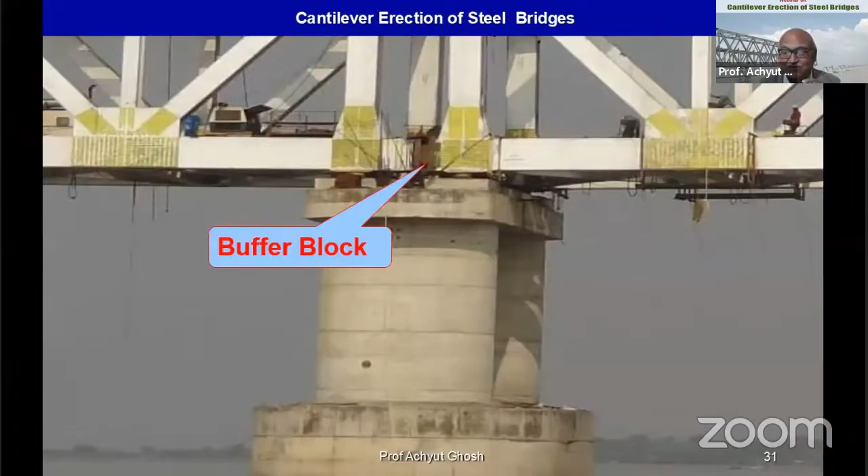How do you prevent it? I'll stay with my word, permit. How do you permit it to sit on the pier? You can't. So that's why this link is going to fall like this.

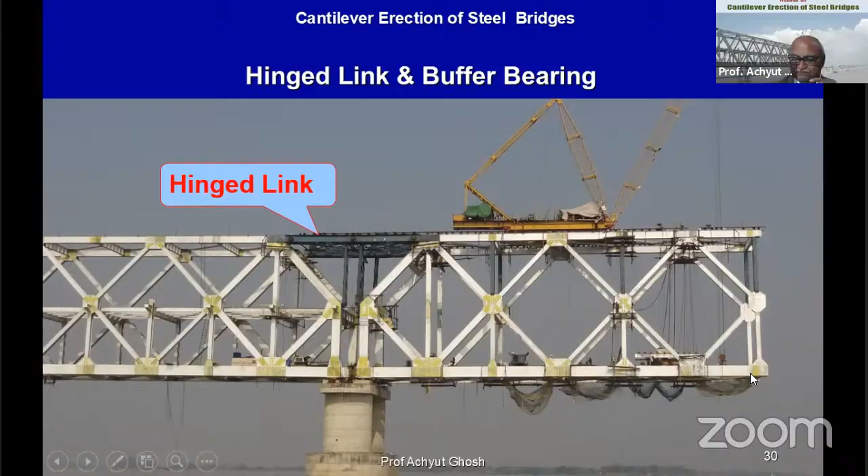There are two kinds of leveling: one is vertical leveling, another is lateral leveling, along this axis. So you do these two corrections with the jack and set it on the bearings.

I hope I have been able to clear the thing. Yes, may please, Achyuta. May I just complement what Mr. Achyut Ghosh said?

Mr. Ghosh, you have a detailed drawing of the link. Perhaps if you flash that, you will see that on one side of that link pin hole, there is a slotted hole. You know what the purpose of the slot is? When you push this, the thing moves, otherwise you would never be able to open the link. That slotted hole is provided so that when you jack, the whole thing moves, and then the pin becomes loose and you can just hammer it and take it out.

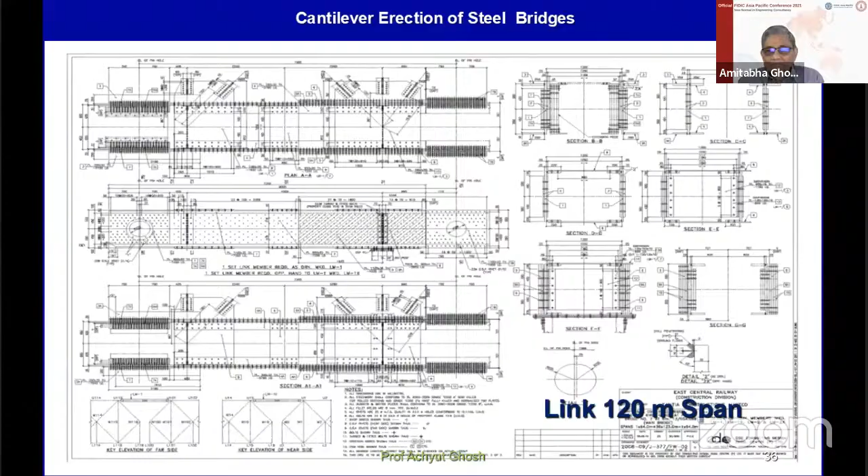Okay, another question by Mr. Barun Kumar Basak. What can be a rough idea of installation time, as days or per meter? I think meters per day perhaps, for the erection part, span of such cantilever steel bridges.

Shall I answer that question? Please, sir. Mr. Barun Basak, the question of rate of erection naturally depends on many things. If it is a small span, say 150 feet or 45 meters, it can be erected in 7 days. But that does not mean a 300 feet span or 90 meter span can be erected in 14 days. It is not a direct proportion.

It depends on the complication, and as you've noticed, these spans which Mr. Achyut Ghosh has shown are double-deck bridges — there is a rail deck and a road deck. So the number of pieces you have to erect is not directly linked to the length of the span. These things affect it, but generally, a very good erector, after a number of spans — not the first or second span, but when repeated, say the third or fourth span — a 45 meter span can be erected in 7 days. That is what BBJ used to achieve.